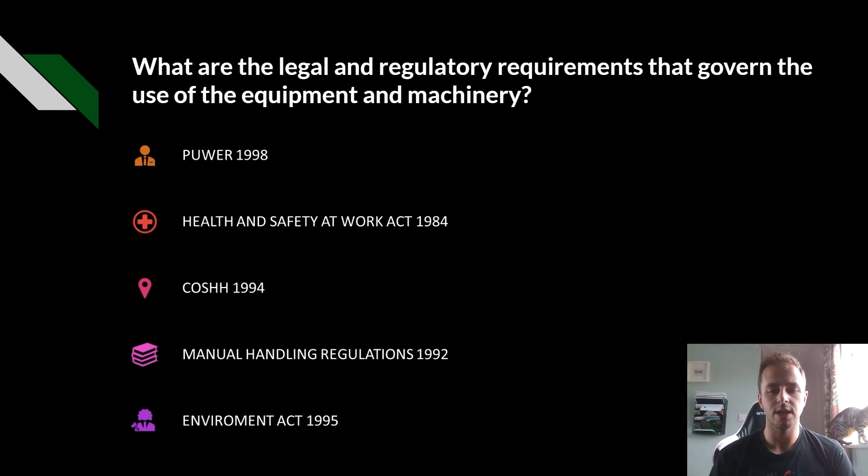What are the legal and regulatory requirements that govern the use of equipment and machinery? We have PUWER 1998, Health and Safety at Work Act 1974, COSHH 1994, Manual Handling Regulations 1992, and the Environment Act 1995. So a lot of these checks will be generic and they may not apply to your machinery, but

it's important to carry out as many as possible on the strimmer or the brush cutter. Before use of any machinery, users should be able to follow this checklist to ensure that they have completed all necessary checks. The following checks should be carried out before every use. Any breakages, damage, or issues should be reported immediately to the person in charge of maintaining machinery, and any machinery that is deemed unsafe to use should be clearly labelled to ensure that it's not used. This same checklist applies to machinery without engines. Just leave out the non-applicable checks. And if you're unsure, ask.

So, checks before starting the machinery. What we're going to be doing here is visual inspections, checking for damage, any excessive corrosion, any signs of fluid leaks. Now, the fluid leaks might be the fuel tanks. They could also be the top and the heads, the gears, any sort of cracks or damage where the grease could potentially leak out. And you might not notice it till it's hot, but it is important to identify any

sort of cracks beforehand. Visual inspections of belts and hoses for wear and damage. Now, on strimmers, this may be things such as the actual drive shaft, and especially on combi engines where the attachments will need to be put together.

You'll be checking levels of engine oil, hydraulic oil, fuel, brake fluid, coolant, antifreeze. Again, with strimmers, what we're going to be checking for here is the fuel in the tank - is it the correct mixture of two-stroke in the tank if you're using a two-stroke machine. If you're using a four-stroke machine, does it have enough engine oil in? Is it of good condition as well?

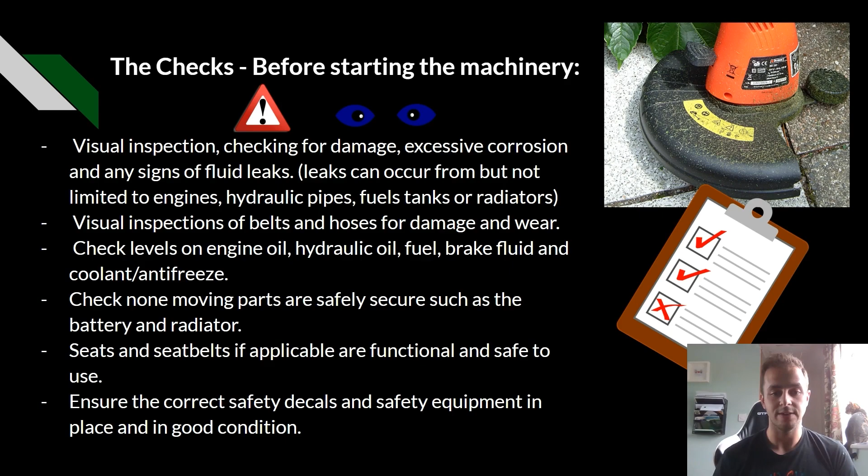Checking data plates, this is important because you want to make sure that it is actually the right machine. You could have a machine that's been marked to be not used, and perhaps someone's put the wrong tag on the wrong machine. So it's always worth double checking that it's the correct machine.

You want to check any sort of blades or PTO driven attachments. Again, for a strimmer, this would be your blades on the brush cutter, or it would be your cord and the head of the strimmer on the strimmer itself. Check to ensure any safety pins are in place and in good working order. So again, this would be something like on the head of the strimmer, ensuring that when you've screwed it on, the pin was in correctly and it's not loose, and that's all good in that respect.

Making sure the maintenance schedules are all up to scratch, all the parts have been lubricated that are necessary. Again, we go back to the strimmer head. That's one of the big things that needs lubricating on most strimmers.

Now, tyre pressures and tyre wear is not applicable, but it's always something worth keeping in mind. Make sure that the wheel nuts are tight. And then again, on the strimmer, just go around and make sure any nuts and bolts are all in good order, anything from the handles, the engine, all the way back to the head.

If you had other machinery, at this point we're also going to be checking the tow bars, linkages, or any attachments, checking the windscreen washer, making sure the horn works. Obviously this is not applicable to the strimmer.

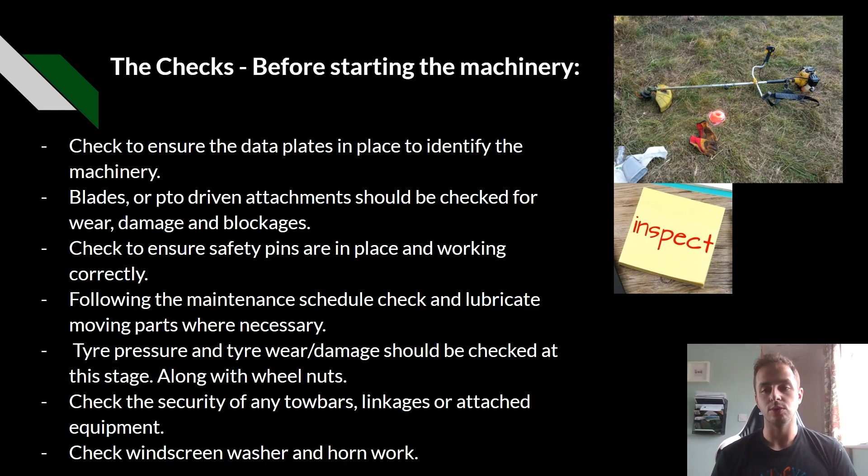Keep that in mind. Checks after starting the machinery. Now this one is really important because it's all good and well being able to use the machine, but if you can't stop it, it's just as dangerous as it being used improperly or incorrectly. So what you're going to do is, once you've started the machine, basically use the kill switch. Turn it off, see if it turns off, and if it does turn off, you're good.

The kill switch might be different on other machines, but there might also be other things such as foot pedals that you need to take into account to ensure that they're working correctly as well, not just during the pre-start checks, but also afterwards, because obviously having the machine turned on is a lot different than having the machine stationary.

Checking for warning lights and any instruments. Again, this is not really applicable to a strimmer, but it's always important. Lights, parking brakes, and any power assisted parts. We don't really have any of these on a strimmer, but always keep it in mind.

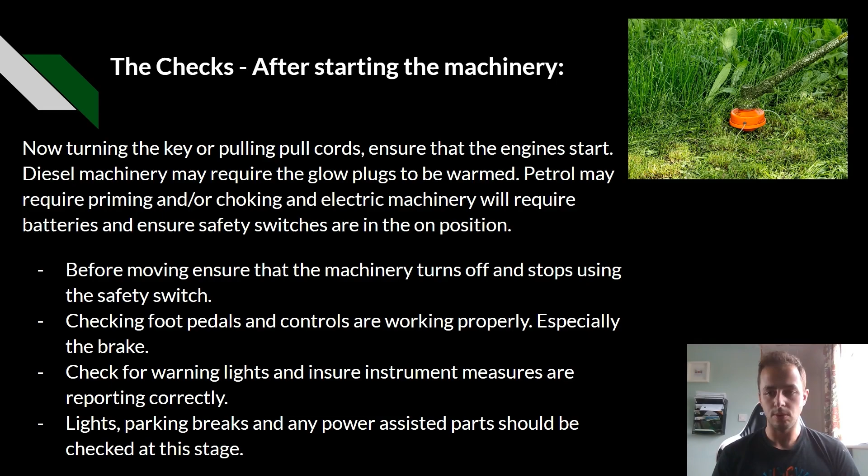Now we're into the parts which really do apply to strimmers. So checking the areas before use. It is important to check areas before strimming or brush cutting. What you should be checking for is stones, sticks and branches, any litter, especially glass, which can be quite dangerous, any wildlife, nests, birds, habitats, any power services, any water services, any sort of drains around.

Is the surface uneven or is it slippery? Is there any debris, including animal droppings? Make sure to note any nearby windows, cars, and glass and valuables. It is always recommended to trim with your back towards glass or anything valuable, just to ensure that if anything does flick up, it doesn't go in the direction of what you're trying to protect.

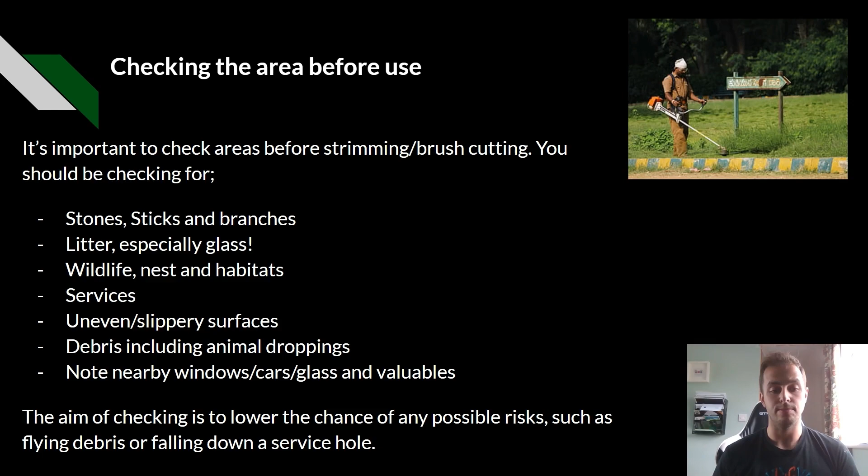The aim of checking is to lower the chance of any possible risk, such as flying debris, as I mentioned, and falling down the service hole.

All the things we can do to protect ourselves and the area we're working in is to restrict the area and signpost. Ensure that areas are closed off or cordoned off, having warning signs in place to show you're cutting. It's also required by the manufacturer to be a certain distance away from members of the public or other workers. This can be defined in the manual for each machine.

So what we're looking out for here is warning signs, any temporary fences or cones. Can we have a banks person watching us? We need to be aware of traffic every few minutes or every half a minute. Poke your head up, make sure no one's around.

Make sure you've got your PPE on. And does anyone around you need PPE? Do you need to make an exclusion zone big enough so anyone around doesn't actually need to wear ear defenders? We're not going to have pedestrians walking close by. And then again, with co-workers, are we having anyone standing as the banks person? Do they need their PPE on?

Do they need their glasses? Do they need their ear defenders?

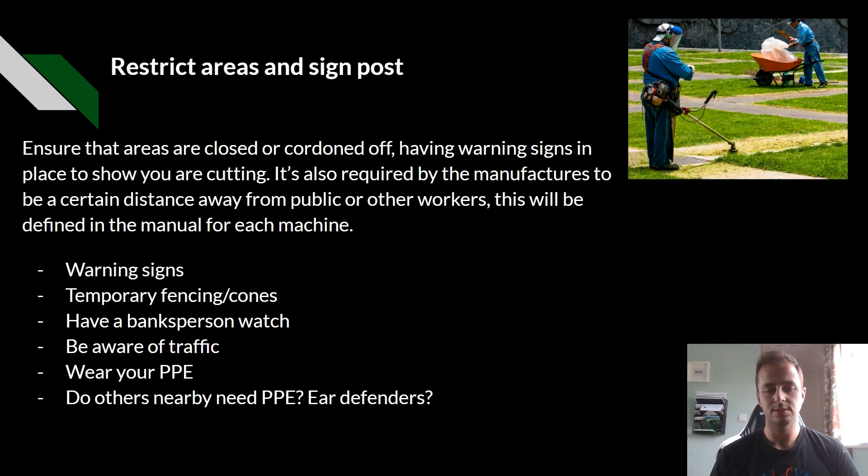Changing the cord is a big thing on strimmers. These will vary massively depending on the make and model, but they all have a similar function: the cord is wrapped around an internal head, which releases the cord as required. It's important to ensure that after the new cord is installed, the fittings are all correctly in place and not loose. If the head is damaged or excessively worn, it should be reported, recorded, removed from use, and replaced. Cord can vary in size, shape, and colour.

Each cord will have a different set of properties outlined by the manufacturer. The manufacturer of the strimming or brush cutting device will also recommend what is best for that machine. Something to keep in mind is to always use biodegradable cord when possible, since having plastics in the environment is a bad thing, and the more we can minimize that, the better.

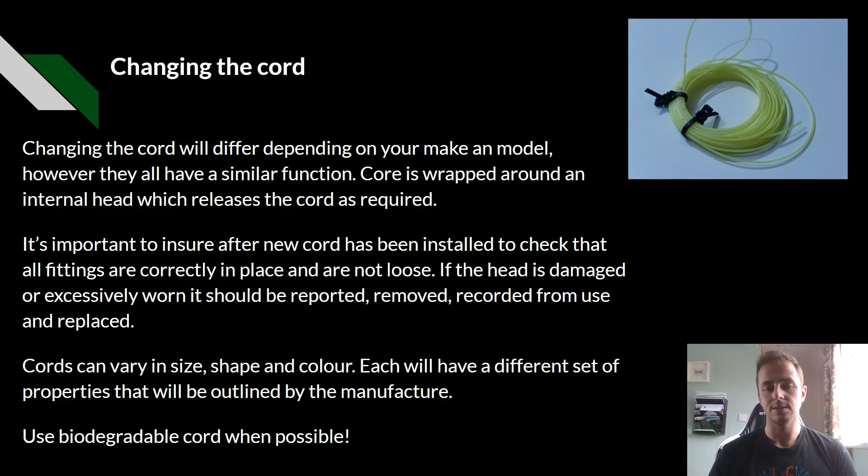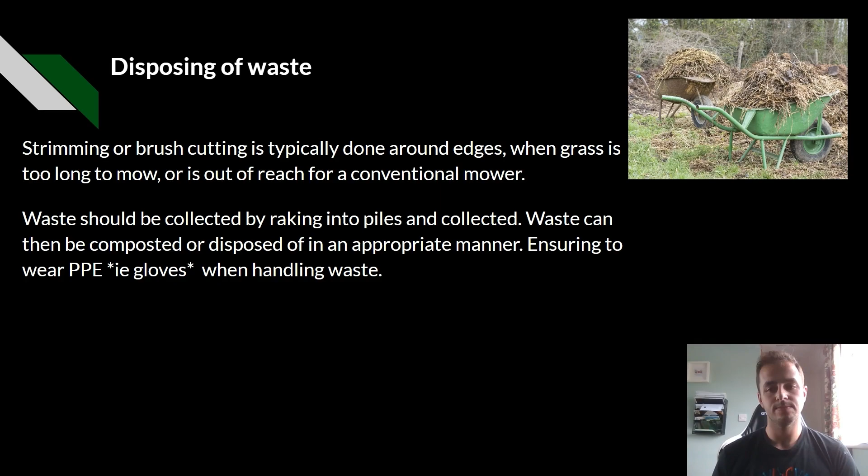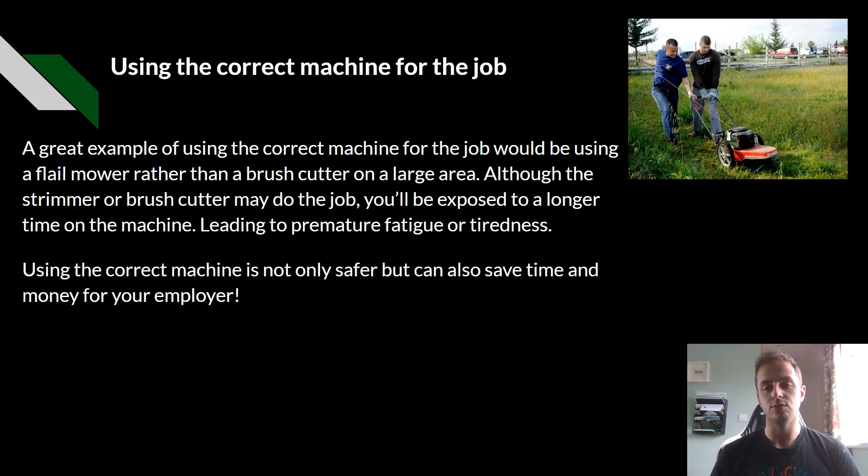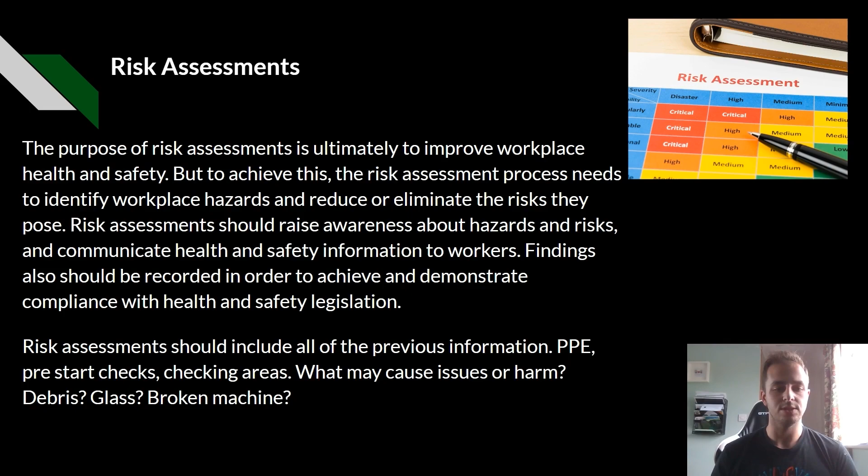Risk assessments should include all of the previous information: PPE, pre-start checks, checking areas — and let's think of other things. What may cause harm? What may cause issues? Any debris, any glass? Is the machine broken?